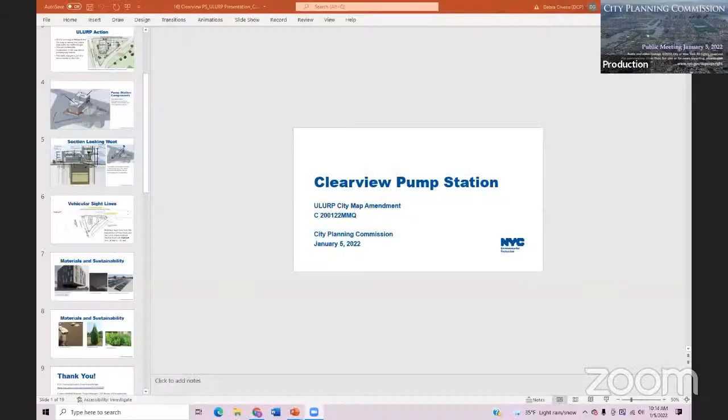Thank you, Commissioners. The next part of the calendar is the public hearing section on page 17. Borough of Queens, calendar number 16, CD7, C200122 MMQ. A public hearing in the matter of an application for a city map amendment concerning the Clearview Pump Station rehabilitation.

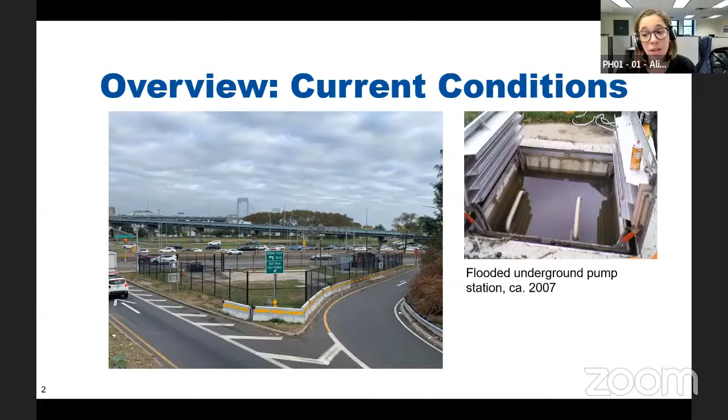Next slide, please. In order to move forward with the reconstruction of the pump station, which is fully designed with Public Design Commission input and approval, DEP is pursuing a change to the city map to demap the portion of the traffic triangle where the existing pump station is located. That area is shown here in red, overlaid on the proposed site plan.

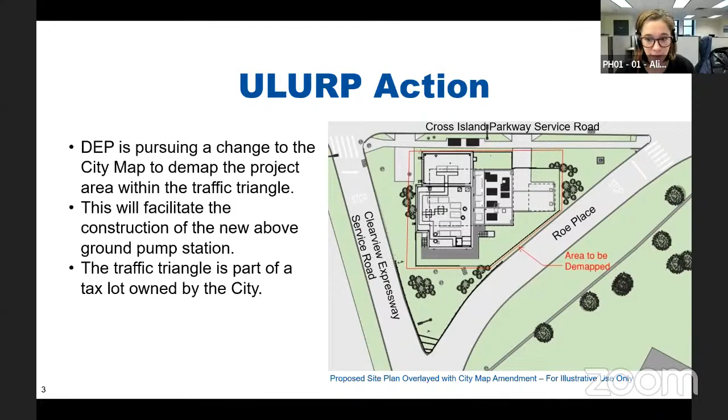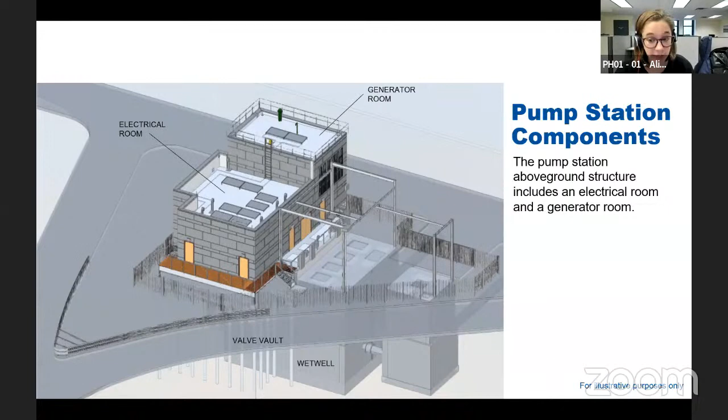Next slide, please. The above ground structure houses an electrical room and a generator room. Community Board 7 recently asked us whether the height of the building could be reduced. We explained that the height of the building is set by the floodplain and the equipment housed within. Additionally, we have worked closely with DOT to ensure that the vehicular sight lines are not compromised. In fact, they will be improved by this project.

Next slide, please. This section illustrates the interior electrical and generator equipment and shows how the 500-year storm floodplain, noted here in blue, raises the interior floor of the building to 4 feet off the ground. We have worked hard to make sure the structure is as small as possible, both in footprint and in volume, and I can get into more detail on that in the Q&A if requested.

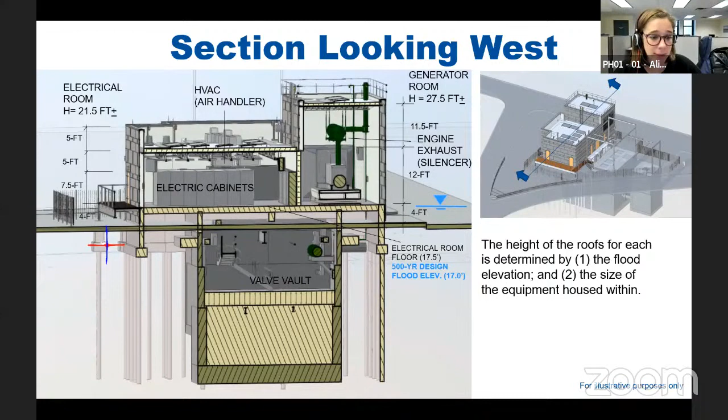Next slide, please. This diagram illustrates that the proposed condition actually improves the line of sight from Roe Place from 39 feet to 155 feet because the existing electrical equipment at the corner is being removed and the new resilient superstructure is pulled back on the traffic triangle.

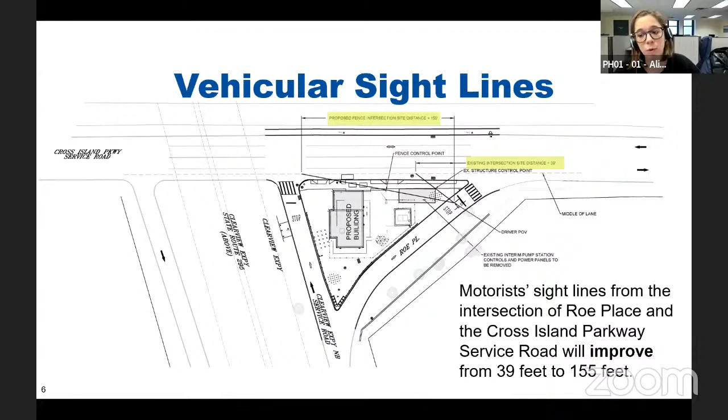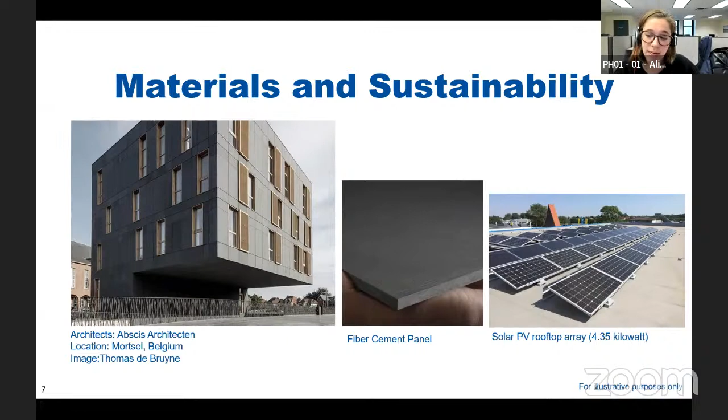Next slide, please. The architectural design features a rooftop solar array that can generate 4.35 kilowatts of green energy in accordance with Local Law 94 and a high efficiency fiber cement panel cladding. This is a lightweight, highly durable and attractive material, and you can see an example of it here on the left used to great effect in Mortsel. The renderings that you saw really don't do this material justice, so I wanted to make sure I spoke to the design intent and our desire to use sophisticated building materials and thoughtful design in DEP projects.

Next slide. We will also have areas of permeable pavement to manage stormwater runoff and native plantings to soften the edges of the building. The design is complete with Public Design Commission approval and the contract is ready to begin procurement with the goal of beginning construction this summer. That's my last slide and I'm happy to answer any questions that you may have.

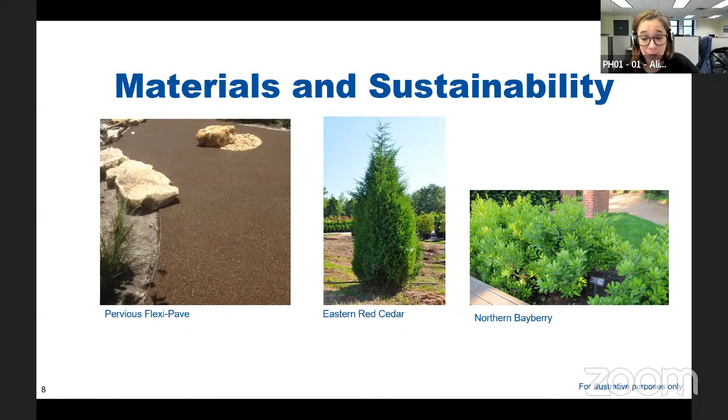Commissioner Ramprashad: Yes, thank you very much for the presentation, and I appreciate the additional section drawings. I didn't see that before in our packages, so thank you. Just two quick questions with regards to the landscape and the guardrail. DEP will be maintaining that throughout its life, right?

Yes. Okay, and the other question I had was, the borough president mentioned about trying to create 2 lanes. Has that discussion gone further with the DOT?

Yes, so DOT has met twice with Community Board 7 and the council member also attended, I think, at least one of those meetings to better understand their concerns about the level of service on the surrounding roadways. DOT explained why adding an additional lane is not an easy or really safe solution to the traffic issues happening here, and they have committed to work with the community and state DOT to find a better solution. Okay, thank you.

Thank you, Commissioner Burney. Oh yeah, thank you.

Thanks, Alicia. I don't know if you were listening in on the review session on Monday. There was some discussion about the design of the building, and reference was made to that other organization, the Public Design Commission. I don't know if you know about that. Oh yeah, I'm pretty familiar.

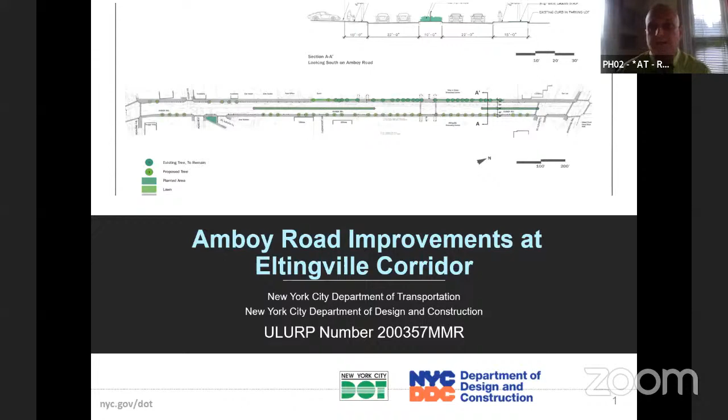Good morning, everyone. Thank you for having us. This is a project in Staten Island. It's a 2,000 linear foot corridor of Amboy Road in the Eltingville section, and it's sponsored by the Department of Transportation and Design and Construction. Next slide, please.

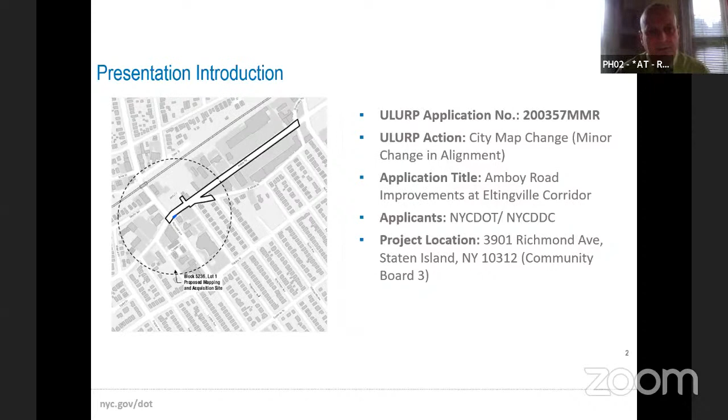I think most of the information here has already been stated, but the project location is 3901 Richmond Avenue, Staten Island, and it's Amboy Road improvements along the Eltingville corridor. This graphic shows you the full extent of the project, which is aimed at improving the commercial corridor.

And the little blue triangle is a small area of acquisition necessary to facilitate these improvements. So I'm just going to quickly go through what the project purpose is, a description of the actions, a description of the corridor and the land use and zoning conditions. There was a CEQR EAS and a negative declaration issued for the project, and then of course any questions you may have.

There's a lot of words here, but I'll distill them down to the city map change for that little triangular portion. The area is outside of the mapped right-of-way at Amboy Road, and the purpose is to facilitate a realignment here because the intersection isn't aligned in a way that the geometry is adequate for what the improvements are intended to achieve. There's a really small area that totals about 120 square feet. It's a triangle, that's the total area - about 6 feet by 30 feet long, 6 feet along Richmond Avenue, 30 along Amboy Road. In addition, with this lot, which is currently occupied by a Burger King, it's a commercial property. There's about 4,330 square feet that would be acquired, but that's already in the right of way and already mapped. So the mapping is really limited to this small triangular area. As I said, the acquisition would allow the city to realign this intersection so that it can be more geometrically appropriate.

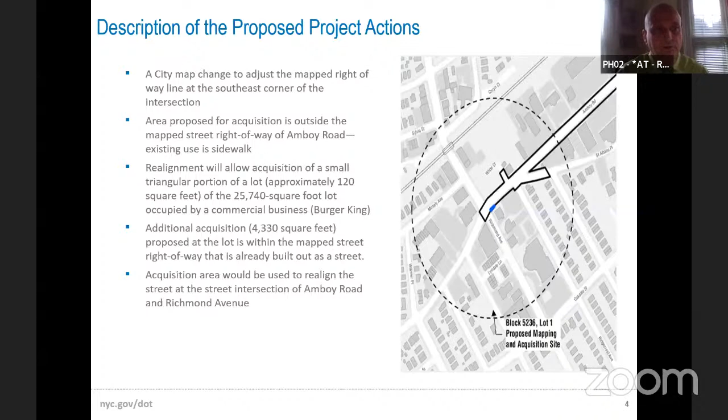Amboy Road, as you probably know, is a critical east-west transportation route across Staten Island. It's also a very critical and important commercial center for the Eltingville area and the surrounding area. The capital project would allow the streetscape to be designed to DOT standards. It would facilitate traffic flow and turning movements. The project as a whole would facilitate accessibility to the commercial center here and would also allow for landscaping and aesthetic improvements that would beautify and improve the corridor as a commercial destination.

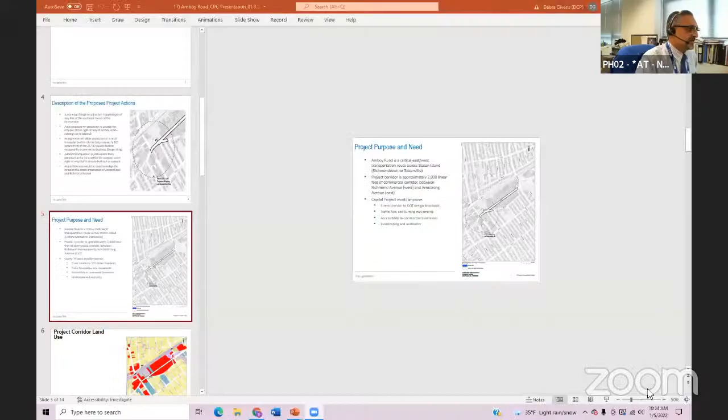Yes, and maybe Nitin. Our project will end on the east side of Richmond Avenue compared to what is shown in there, because whenever we do the intersection, it does all 4 pedestrian ramps. So if it's going past that intersection, it seems like we will go up to the pedestrian ramps, which are across the street. That's the reason it is shown that way.

That includes the intersection, I appreciate that, I understand what you're saying. So all four corners - I want to ask you something about the sidewalk corner on the Burger King corner in a moment. But so the reason your line that encompasses the project geography goes to the east of Richmond Avenue is because all four corners, yes, will have the ADA required pedestrian ramps, corners. Yes. Okay, very good, thank you for that.

What happens where the little triangle is being acquired? What's going to happen going north on Richmond Avenue when you get to the corner? What happens to the sidewalk, and how does it meet the crosswalk? So what happens to the crosswalk as you continue to move, I'm gonna say north on Richmond Avenue, on the west side of Richmond Avenue at Burger King, if you're clipping the corner as it exists now. So what can people expect in terms of the experience of getting to the corner and crossing north?

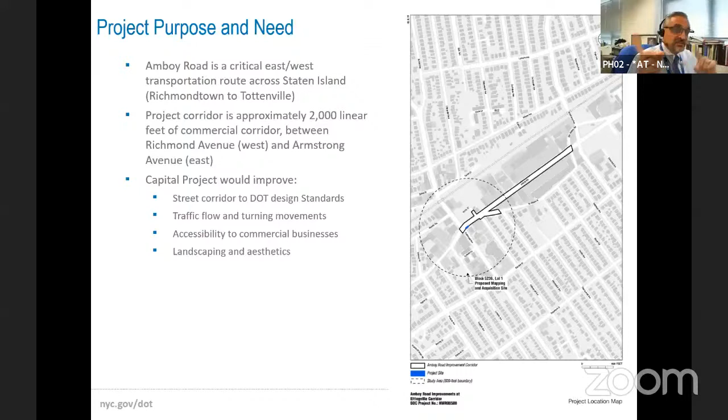The last question I have is: is the project fully funded? Is it completely budgeted through the two years of expected construction? It is city funded, actually, city and Borough President fund or something like that. The allocation is great.

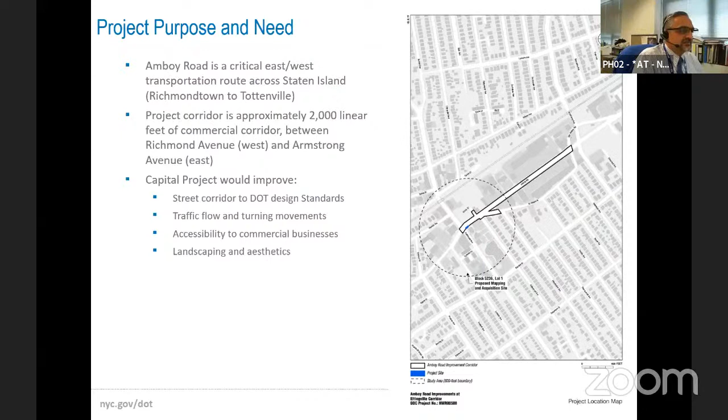I just wanted to make sure that, especially with changes in administrations at both City Hall and Borough Hall, nothing slipped through the cracks. It is fully funded, yes. So it shouldn't be on someone's list to put more money into at some point, unless the costs change, but that's a whole other issue. I appreciate that, thank you very much, gentlemen.

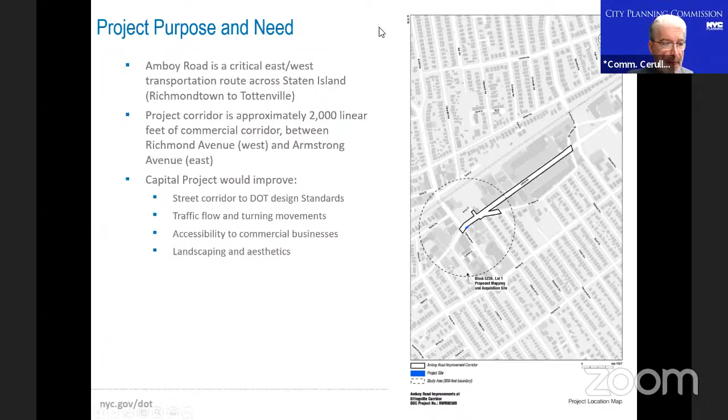Just a quick thing, Mr. Patel, you've been working on Amboy Road since you started at DDC, like 45 years ago. My question is, are you ever going to finish it? We plan to this time. I'm just giving you a hard time. It's okay, I know it's tough. Keep up the good work. All right, thank you, nice seeing you.

You too. Are there any additional questions for this team?

Okay, if not, then I will just ask whether or not there's anyone else present who would like to speak on this item. Ryan, let me know if there's anyone. There are no further speakers on this item.

Next item, Borough of the Bronx, calendar number 18, CD6, C220091ZSX. A public hearing in the matter of applications for the grant of a special permit concerning 660 to 668 East Fordham Road.

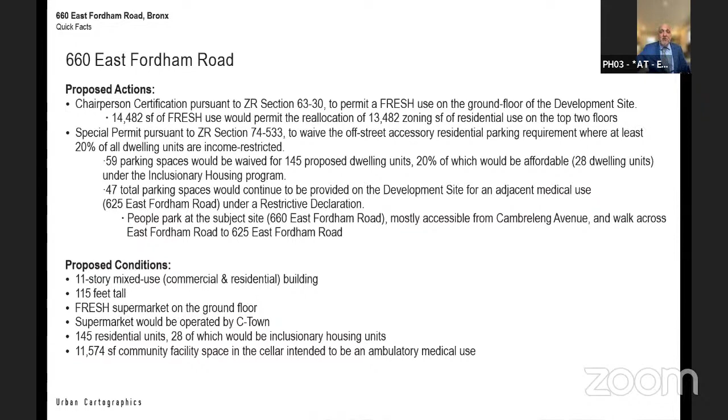Next slide, please. You can see the building here. It's not a really good looking building, it's in a difficult spot. There's been no new developments pursuant to the C4-5D district done in the last 5 years — I don't want to say since it was created — and there's been no voluntary inclusionary housing created.

You look at what the parking lot is here and look at the site. The owner is a local gentleman, his name is Sean Davenchar. He owns the building across the street. He is fully invested, he's spoken to banks. Everything is hinging upon an approval from this commission.

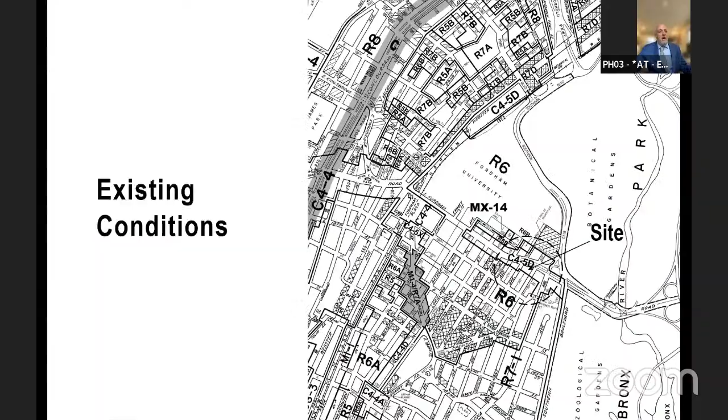Next slide, please. Next slide, please. You can see the site is right smack in the middle of everything you'd want it to be, in the middle of the Bronx Zoo, Fordham, New York Botanical Garden.

There is parking across the street by Fordham University, nearly 2,000 spots available. You can see the neighborhood around here.

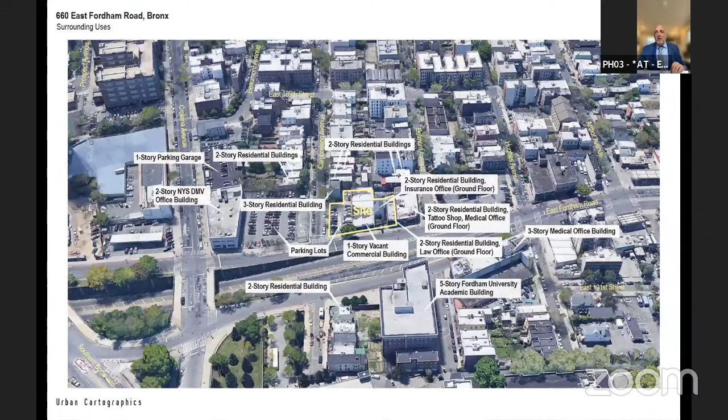This is the slide I wanted you to focus on for a second with me. The site is located right there in the middle. You can see across the street up top in the pink, 685 East Fordham, private Fordham University, 1,030 parking spaces. I dare anybody to go try to park there right now. It is locked. You're not allowed to park.

That building and that property, we believe, after reviewing quite a few documents, was approved by the City Planning Commission, and part of the give back was the requirement that it be open to the public. It's locked. I'd also like to call out that the lack of parking, although a concern raised by the community board, there was also a lot of internal personal issues between the applicants and other people at the community board that were longstanding, which is why you may not have heard the borough president echo the parking concerns in his report. And we know he wanted more units.

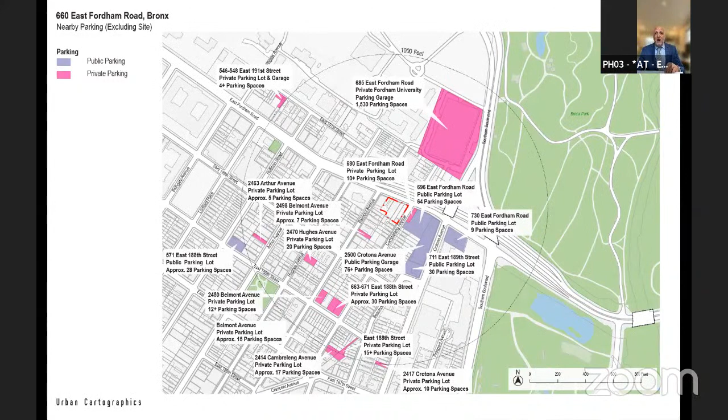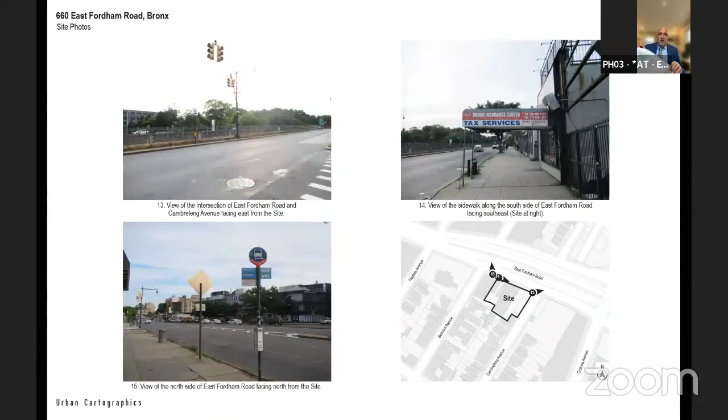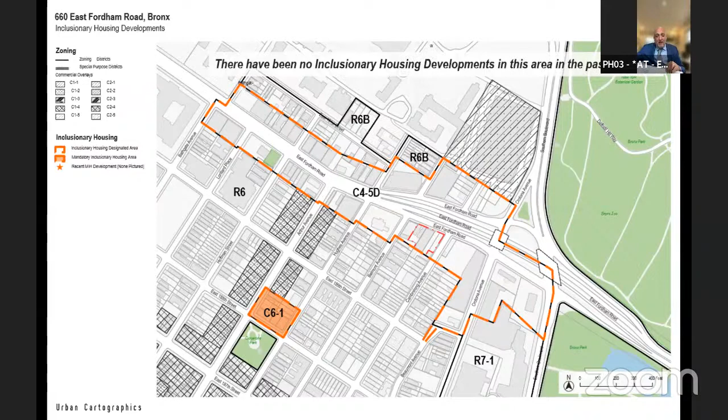People in the area need housing that's affordable. Unfortunately, 2 and 3 bedrooms, at least in Sean's mind, pushed that income level and the amount people could pay over the top. That's why the unit distribution is where it is. If we could go back and change it, we weren't chasing 421, we would, but we can't. 421 is a state law. It expires in July, or June, excuse me, with or without us. And if it goes down, so does the affordable housing.

Josh, do you want to speak for a moment about, or Jacqueline, excuse me, do you want to speak for a moment about the affordable housing, what you've done with HPD to secure this? Sure. Good morning, Commissioners. Jackie Scarinci from Ackerman, and we're representing the owners here on the inclusionary housing application.

As Eric stated, this is the unit distribution that we had prepared, worked with the owners on, and had approved by the inclusionary housing unit at HPD. There are corresponding plans filed at the DOB that have coordinated mechanical, structural, and engineering drawings that all account for this unit distribution, which has a mix of studios, 1-bedrooms, and 2-bedrooms. As the inclusionary housing program requires that we have a proportional mix, there is a proportional mix between the market rate and affordable units here.

You can also see the rents. This is a voluntary site, so it's 80% AMI and below. And actually, most of the affordable units here are, on average, slightly larger than the market rate, the 1-bedrooms and the 2-bedrooms being slightly larger. If there are any questions, I'm here to answer them during the Q&A as well.

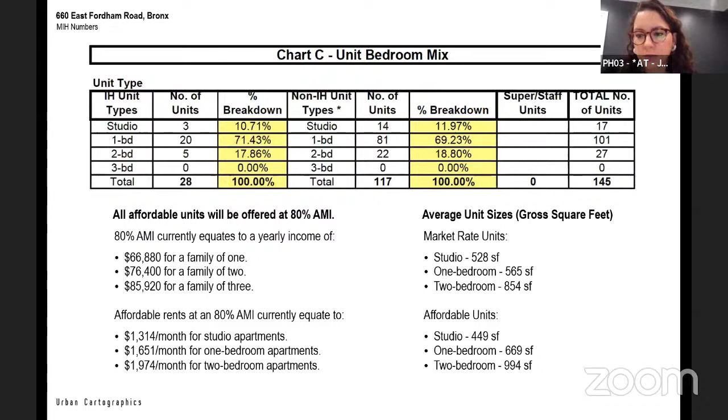We are not building cheap student housing. We're trying to build a building that's going to make a mark. The owner is a neighborhood person. As I said, he's operated the medical facility across the street for a decade. He's been involved in the rezonings. He sat in community board meetings. He sits with local electeds as time goes on.

He did not mean to run afoul of a unit distribution mix, nor did he ever mean to get into the middle of a unit distribution mix desire and an HPD 421 deadline. And that's where we are. So please, we're asking you to look, as the new mayor says in his term, I love it, it's emotional intelligence, and I've interpreted that to mean to look behind the scenes.

Not every effect is there for the same causes. We would change it if we had the time, but we don't have the time. We still don't even have solidified financing. We're very close, and it's all hinging on everything coming together. Trying to get a lender to lend on this strip in this area for a brand new ground-up development is no easy feat. We're close, and the owners invested a lot to see that happen.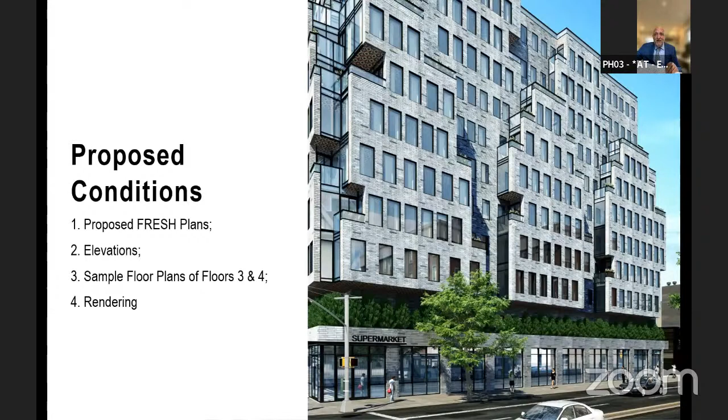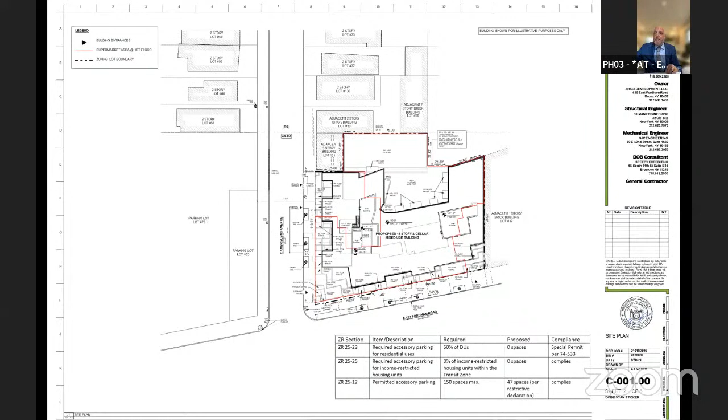Next few slides, we'd like to ask the architect to speak to it. Ben, if you could speak to the layout and configuration of the traffic and landscaping for the next couple of minutes, show the commissioners how you get in with cars, and show them what you've done at the second floor to add the additional parking spaces, and why you're limited to just adding 9 more. Good morning, Ben Greenwald. Good morning.

Yes, I'll talk to that. I just want to say for one second what Eric said. Since we have been with this client, Sean, the only thing he's constantly said is this building is designed for people of the community. The amenities are made up for people of the community. There are families. Everything is based for families of the community that work for him, and that he knows, and he knows what the community over there needs.

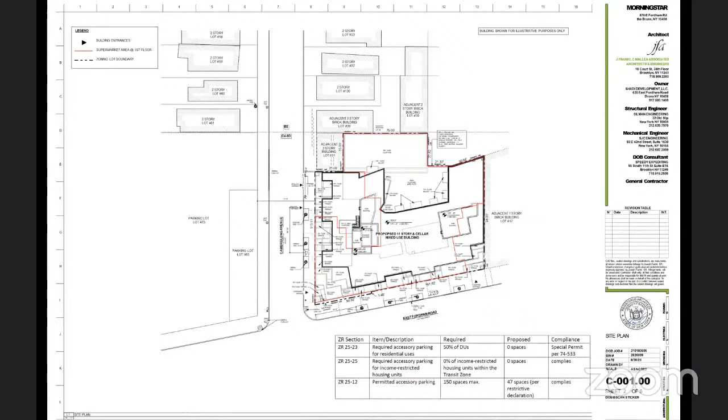Regarding the parking, if you go to the next slide, this is the first floor. There's a fresh- if you'll see, there are 2 car lifts that will bring the cars up and down. There's an undercover, covered loading berth right before, so people could come in, and there's an attendant booth, so people don't have to park their cars themselves. They come in, they drop the car, and the attendant will take it up with one of the 2 elevators provided. The reason we have 2 elevators is because we know sometimes traffic could pull up, so the owner wanted to put in 2 elevators. This way there's always enough room, always enough people to take a car up and down, so people don't have to wait for their cars.

Ben, if I caution you, you have 30 seconds left, Ben. Next slide.

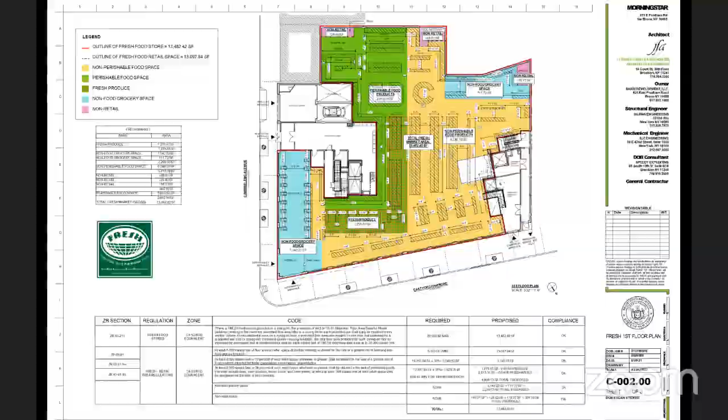Over here, this is the second floor. You'll see we added another 9 spots. We added some stackers, so you have 25 stackers and 6 non-stackered parkings. This gives us an additional 9 spots besides the 47 declaration that we need for the other building.

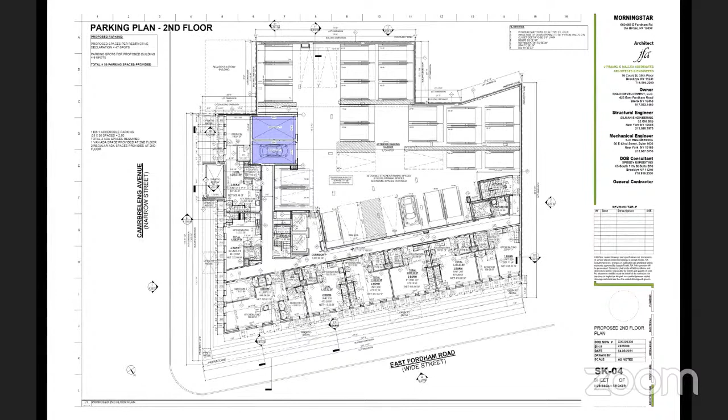You asked a question about the planters. We heard the question, so I'll talk about that for a few seconds. If you go to the next slide- it's right after this, Ben. So if you see- your time, excuse me, your time has expired, but I will ask the first question for you to just elaborate on the planting.

One of the main focuses for the client was that he wants to build a beautiful building, something unique, something nice for the neighborhood. He wants to bring in environmentally friendly elements, make it feel nice, and work with the environment. One of his main things was to add a lot of greenery into the building. If you see on the first floor, there are a lot of trees, and on all of the terraces, there are tree plantings. I've heard a question about how this is done.

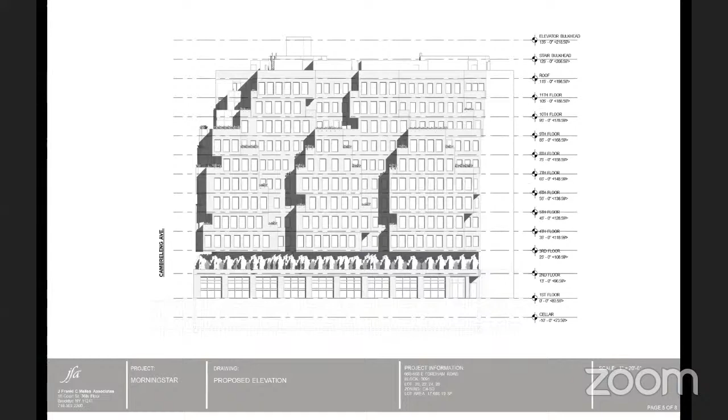So in the next slide, we'll show you how we're doing these plantings. All of these planters go into concrete boxes, concrete planters with special drainage, special soil that continuously feeds and drains the water throughout. This is something we're doing a lot on buildings- it's done on most of the rooftops. It's a proven system that works and brings beautiful, amazing results. It brings a green environment into buildings and gives people living there the feel that they have outdoor space with greenery and fresh air. If there are any other questions, I'll gladly answer.

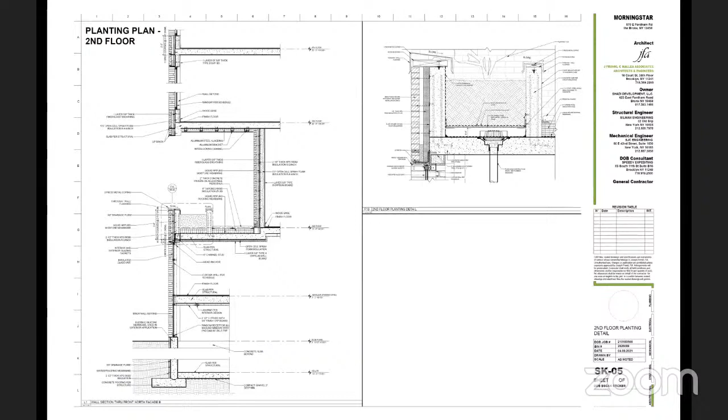Okay, thank you, thank you very much for your presentation. Thank you for the presentation. I just had two questions of my own, one of which was with respect to the additional parking spaces.

If you're telling us this addition is the maximum you can accommodate on the site, I'd just like to understand that. Yes, because when you add parking, every stacker needs to have maneuverability as well, and we need ADA spots. So in order to be able to maneuver all the cars, we could only fit in 25 stackers. The 25 stackers give us 50 spots. Besides that, we need 6 spots- 3 of them are ADA, and the other 3 are regular spots able to be maneuvered. We have looked at this over and over again. If we could have given more spaces, we would definitely do so.

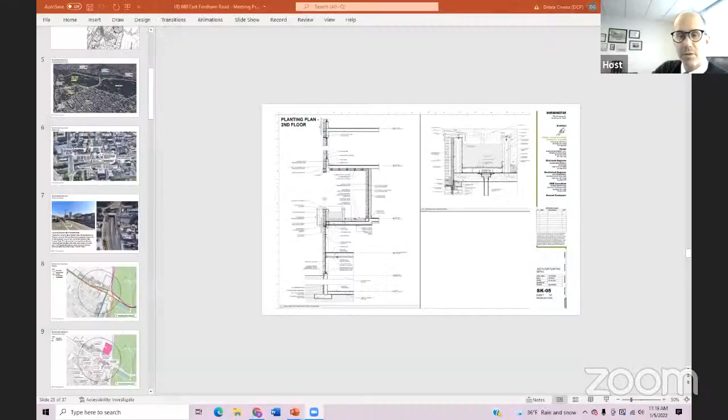Is there a way, Ryan? Yeah, we can try and get that up. Screen 5. We can try to get that up. Jeff, do we have it? There we go, here we go. Okay, which slide is it? I think it's 5. It's an aerial, there you go.

Free right there, beautiful. Okay, so what I'm trying to depict here is, first, everything slopes up a little bit towards the Botanical Garden. You can see that Fordham University, between us and the Botanical Garden, is quite some distance away. We're up very high in the sky here. Our building, of course, is to the north of that, and the sun comes from the south, so that helps also.

I imagine everything would be a sensitive receptor, and then the full analysis would have been done there. Plus, we did an EAS analysis as part of our studies, as we're required to, and we received a negative declaration from the city's Environmental Assessment and Review Division, the division of EARD, from the City Planning Commission. So I don't think that's the basis - the picture, my common sense looking at it, the EAS that's been done, the past history of the rezoning, and the location of the property - I think all give me the confidence to say that I don't think it causes any issue. I think the paperwork we probably would have screened for it, I'd imagine, but I could triple check that for you also and get back to the commission.

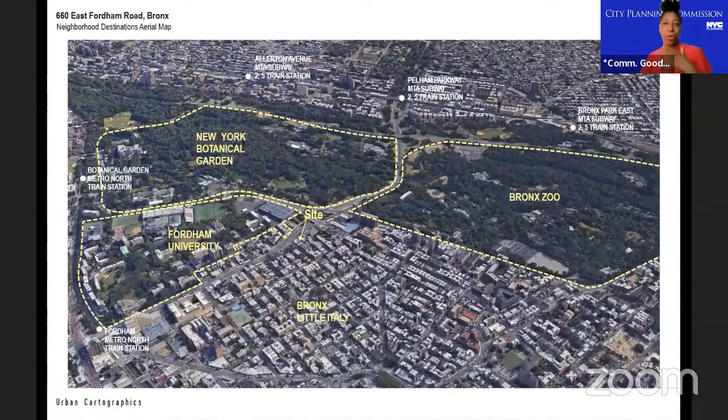It's a bit like Whole Foods, which I'm not sure if it'll be really affordable. Oh, no, it's down. C-Town. Oh, C-Town, okay. I was thinking of Fresh Market, which I'm thinking is sort of like a Whole Foods.

My question on that is, I don't know if it's already been decided that it has to be a supermarket, but since there's been a lot of discussion about the fact that that area is very family oriented, would there be any thought to something like a daycare, something that would directly address the family oriented nature of the neighborhood?

There is no 'the Fresh program' separately — the supermarket is part of the Fresh program. That's the proper noun for the bonus. There's a bonus that could be achieved under the chair's authorization. So it is locked in, and that's part of, as you can see, following the theme of the building. We're trying to get every square inch.

The only way to get it financed is no different than all of us — I don't know if anybody bought a car recently and saw the VIG they put on the cars. The banks are no different. The only way we can get this financed from a bank is if we get every square inch we can out of it. So the Fresh and the parking reduction are both an attempt to satisfy a bank and a lender to show them that it's an unproven market. We're providing affordable housing, it's a risk. We get that, but we're very comfortable that we could pencil it out. So the Fresh program allows that to happen by providing more square footage, as does the parking reduction.

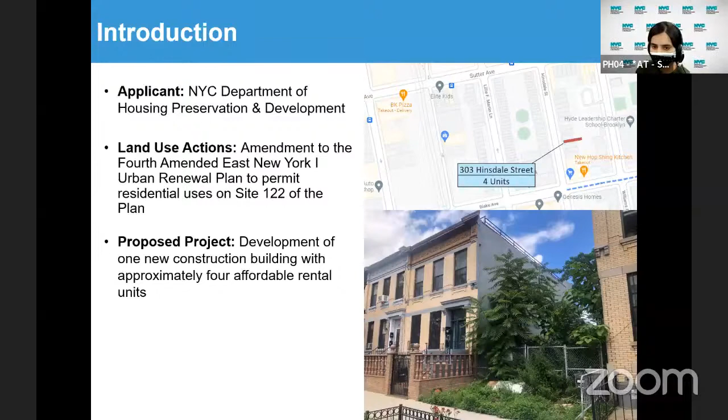HPD is seeking an amendment to the East New York 1 Urban Renewal Plan to change the use restrictions on Site 122, located at 303 Hinsdale Street, from open space to residential use. As you can see in the picture, the site is an underutilized vacant city-owned property. Approval of the requested action would facilitate the development of a small 3-story new construction building with 4 affordable rental units, an appropriate use to its surrounding context. The proposed project would improve the vacant lot, elevate the overall condition of the site and its neighboring buildings, and bring additional affordable housing to the area.

The development site is an ideal location for residential development, as seen on this aerial view. It is adjacent to 1 and 2 family buildings and across the street from a former shelter that is being redeveloped into affordable housing. Public transit in the area includes the L train at Van Sinderen Avenue 2 blocks to the west and the 2, 3, 4 trains at Livonia Avenue to the south. Bus service in the area includes the B14, B20, and B83 lines.

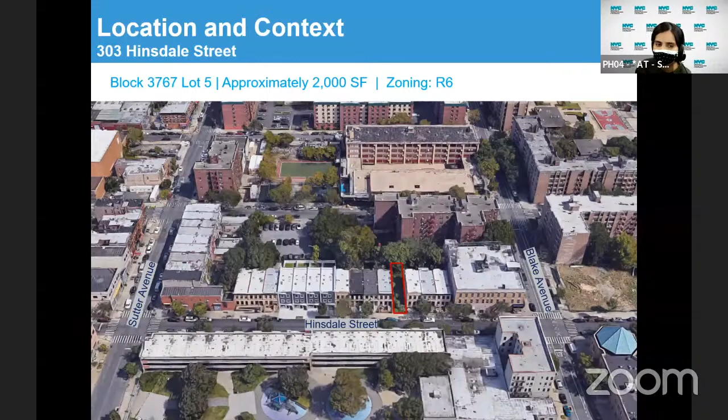The area surrounding the site contains several open space uses, as this map shows. For example, the PS 328 community playground is located within 600 feet of the proposed development, and the Success Community Garden and an open space within NYCHA's Unity development are located within a quarter mile. Beyond that, there are many other parks, playgrounds, and gardens within half a mile, including Hands and Heart Community Garden, Grace Playground, and Livonia Park.

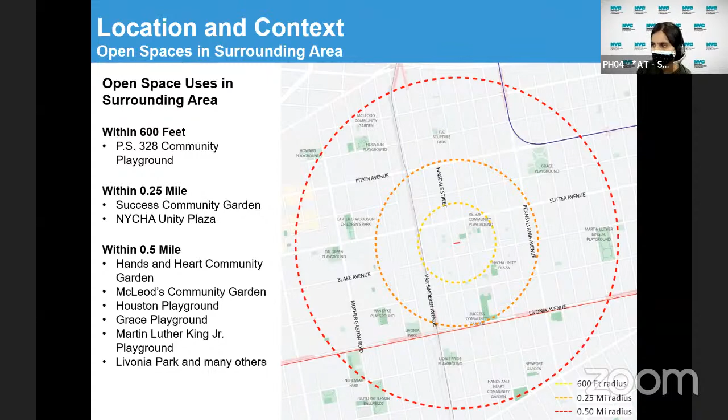In consideration of the site's immediate neighboring context, the proposed development is a small 3-story residential building with 4 affordable rental units developed under HPD's Neighborhood Construction Program, or NCP. The proposed building will have a mix of unit types, including studios, 1- and 2-bedroom units, and will serve households earning up to 60% of area median income.

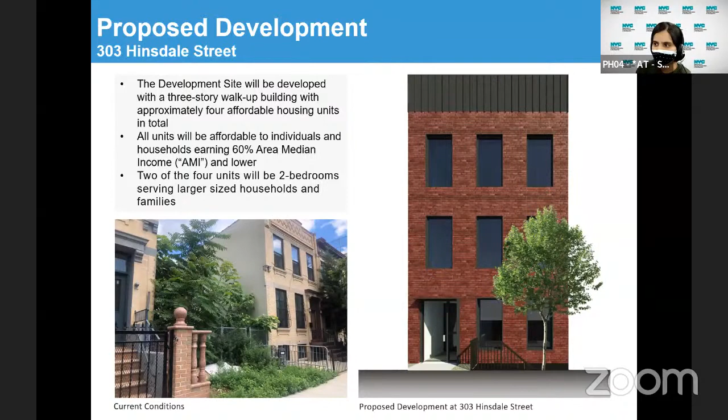And finally, we're anticipating ULURP approval in spring of 2022, hope to close in the summer of 2022, and complete construction in winter of 2024. Thank you again for having us here today, and we're open to any questions. Thanks.

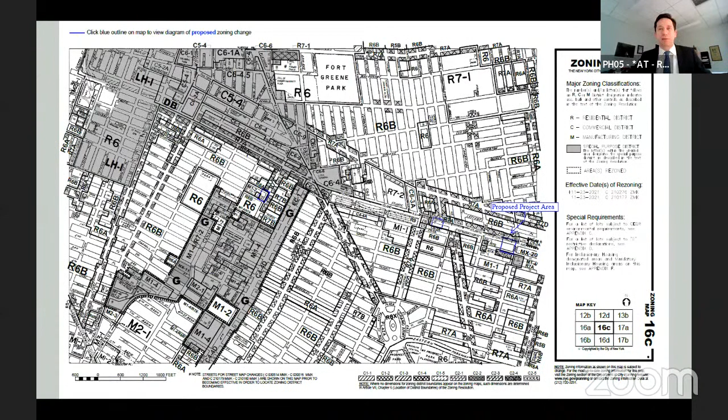Now, all of these involved streets that were narrow streets per zoning, and of course, Atlantic Avenue here is a wide street. Next slide.

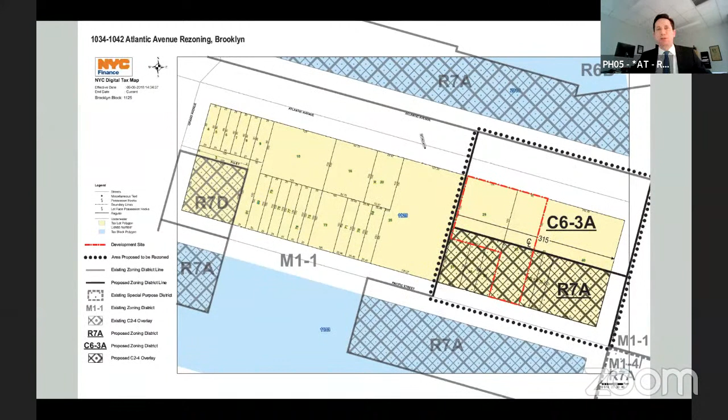So briefly, you can see the tax map here, as well as the development site highlighted in red, which would produce the proposed 17-story building with a lower massing along the R7A portion on Pacific Street.

Next slide. The land use map actually really well illustrates why we feel this rezoning is appropriate, primarily because you have Atlantic Avenue here at 120 feet. This is an extra wide street, one of the widest thoroughfares in Brooklyn. And given the width of the street and prior city planning actions, as well as the department's presentations to the commission, the street width here is really well suited for the bulk of this building.

This is a unique opportunity to provide residential and, importantly, affordable units in an area with excellent transportation options, which is close to retail and services and allows for commercial use as well.

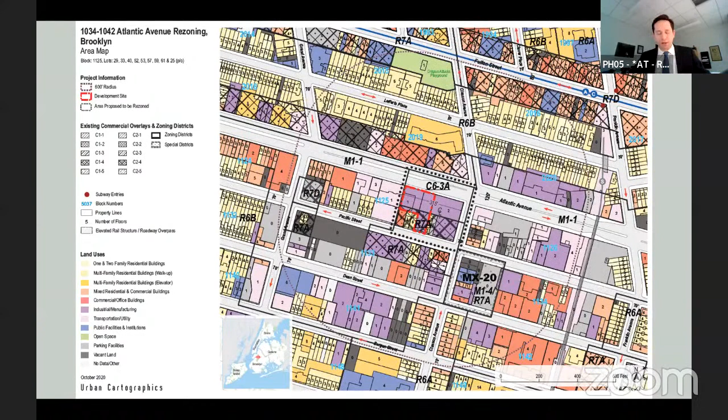Next slide. So I think with that, if we can just page through the photos showing the surrounding area and the low-lying manufacturing buildings, the next slide with text would be the environmental review portion.

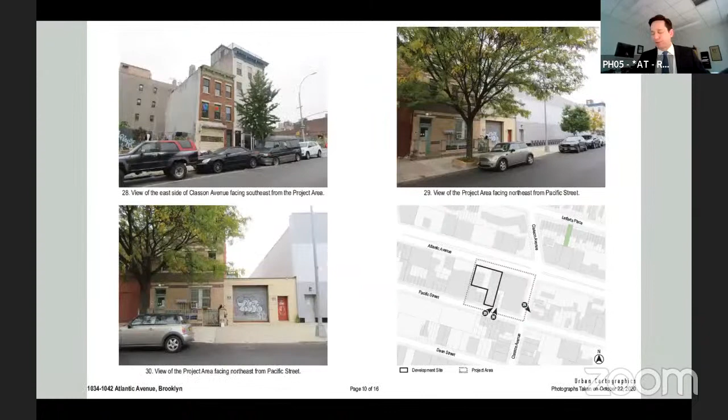And for that, I would ask Kevin to speak for 2 minutes. Kevin? Thank you, Rich. Can everybody hear me clearly?

Okay, so an environmental assessment was performed on the project. The typical type of impact categories were considered with particular reference for a project of this size. I can go to traffic if there are any questions on some of the other analysis, such as socioeconomics that was performed, or any of the other components.

In terms of traffic, a comprehensive traffic analysis was not performed. Having said that, in terms of vehicular traffic, you only trigger what's called a level of service analysis when you exceed 50 cars per intersection. The project does not exceed those numbers. A pedestrian analysis was performed because the project generates over 200 trips at the project corner on Atlantic, and there showed no reduction in capacity on any of the sidewalk components.

We also performed a parking analysis. That parking analysis showed a comprehensive parking analysis for a quarter-mile area, including on-street assets, as well as a qualitative look at off-street assets such as private car garages. What that analysis shows is obviously parking is constrained, but we analyzed 2 time periods, in March and November, to account for COVID. During March, there were 418 available spaces of capacity in the on-street capacity within the quarter-mile. During the November 20th at noon utilization, there were 71 available spaces of capacity.

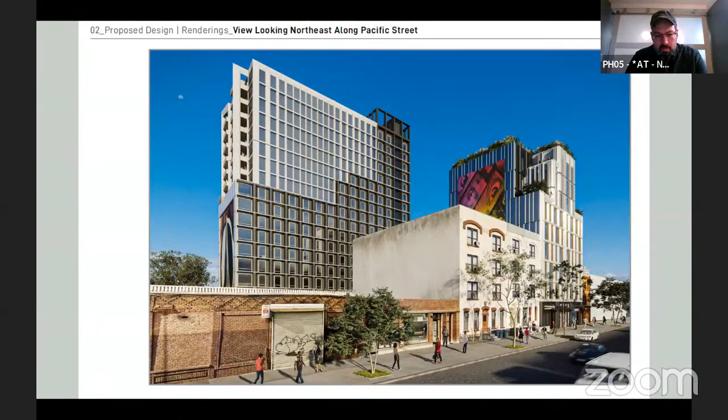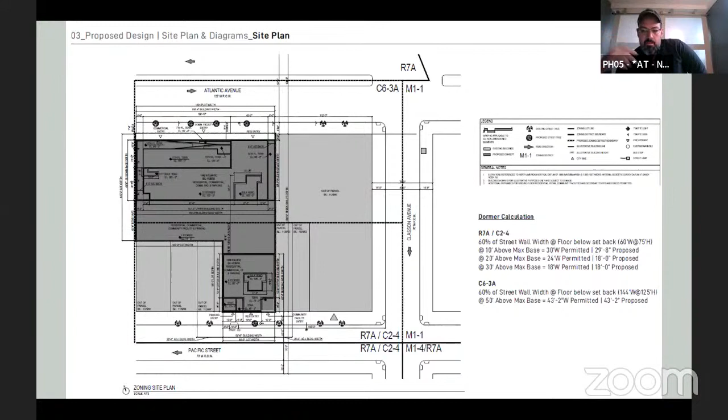The C6-3A is a very interesting district for this project because it gives us something counterintuitive at first blush, which is that the extra height lets you do something with the building form that lets you attenuate it in a way which reduces the impact to the street. So this is something that, beyond the land use rationale that Rich discussed before with the width of the streets and the proximity to all the transportation infrastructure, lends itself to a much better building massing, vis-a-vis the street and the pedestrian experience.

Next slide, please. So you can see here, the larger building, what this lets us do is playfully push and pull with this massing in a way that reduces the impact on the street. So you have the lower building portion on the west side, which is to the right over here, and on the east side you have this taller tower element. So you get this point-counterpoint compositional interplay, which again reduces the impact on the street.

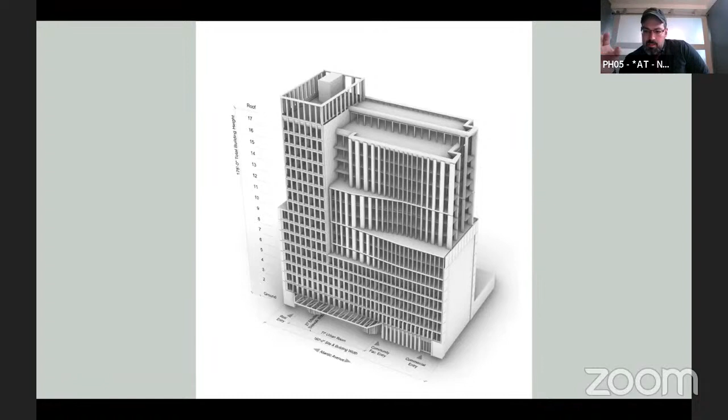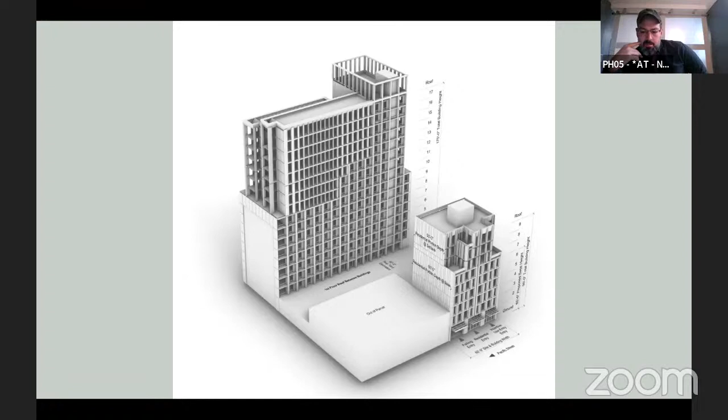Next slide, please. This is the rear of the building and of the Pacific building. So the Pacific building you can see here is 9 floors, 95 feet high, which is typical of the R7A, which is infilling this entire area. There have been several rezonings across the street, on the corner, down the street, and this is also generally in keeping with the M-CROWN plan that the neighborhood had come up with originally. So you get this infill development, which is typically 8 to 9 stories tall with a setback between the 5th and 7th floor. Next slide, please.

We have parking in the cellar. What we had originally set up was a community facility, a childhood rec center, something akin to a Y, and we've been going back and forth with the community board for the past year trying to dial that in. Right now it's not certain that's what we're going to be offering, but that's what we had been designing for about a year and a half. So we have this rec center, which is in the cellar, open to the first floor. It has a very significant presence on Atlantic Avenue. The thought is that we have something we'd be offering back to the community. This would be one of the more significant developments in this area.

And it's something where our client Eli Pariente has a very honest desire to really make this the heart of this neighborhood, and there's something appropriate to that, both in the way it's situated vis-a-vis the rest of the neighborhood. It's in the middle, and in the way you could think about Atlantic.

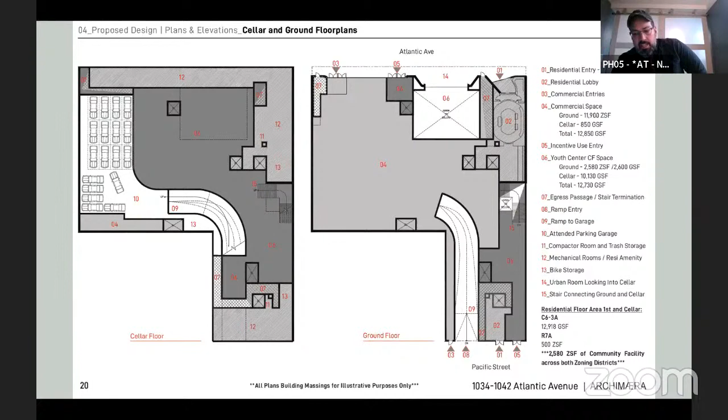We'll open it to questions from the commission. And certainly they can ask you to elaborate on anything. Are there any questions from the commission?

Commissioner Burney: Thank you. I had a question about the mural that you show at the end of the building on one of your renderings. I'm just interested, who's commissioning that? Who's the artist? How is that being processed?

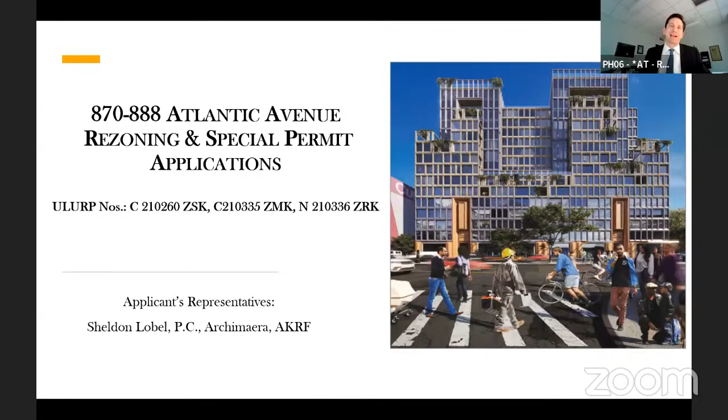So this is for the 870 to 888 Atlantic Avenue rezoning and special permit. To summarize the project, we seek 4 actions. The first would be a rezoning of 7 lots, inclusive of the project area and the development site, which is 20,000 square feet, from an existing M1-1 district to a C6-3A district with an equivalent of R9A zoning. A text amendment would also be sought. Currently the iteration included option 2 and workforce, although more recent discussions have centered around options 1 and 3. A text amendment would be sought to provide for a 20-foot minimum sidewalk width, and a special permit to reduce the number of parking spaces, which will be addressed by the remainder of the applicant team. The result would produce a 17-story mixed-use residential, commercial, and community facility building with approximately 228 dwelling units, of which roughly 69 to 70 would be permanently affordable, as well as local retail.

So this is a similarly situated rezoning, also along Atlantic Avenue. A primary difference is the prior rezoning at 840 Atlantic Avenue, the development site and project area of which lies immediately to the west of this site. In addition to understanding the history of rezonings in Community Board 8, particularly the R7A districts approved along Pacific in 1010 and 1050, as well as the R7D at Grand and Pacific, you now have the immediate precedent of a C6-3X combined district, which also included other elements on Atlantic Avenue, further supporting the land use rationale for the C6-3A requested at this site.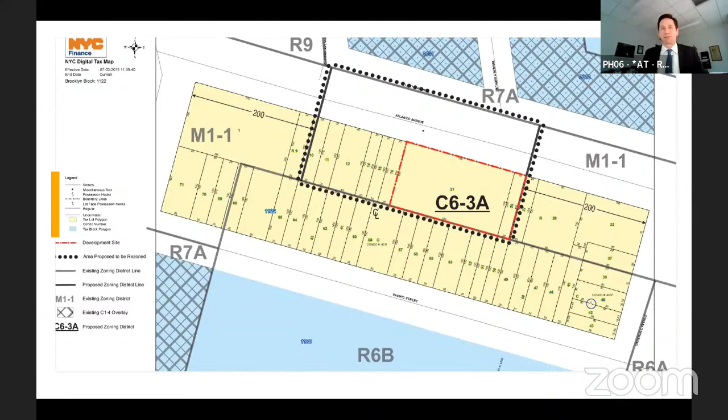So I would just conclude with the area map, which supports the rationale for the rezoning. You've got Atlantic Avenue here at 120 feet wide, and across the street you see the R9 that was rezoned as part of the rezoning along Vanderbilt and Clinton Avenues. So the additional density here on Atlantic Avenue is particularly appropriate.

We've had conversations previously with the community board, as well as the Brooklyn Borough President, on modifications and changes to the building which would allow for additional contextual changes. Those are currently in process. But we do recognize the importance of this rezoning and the opportunity now to create these units absent a larger area-wide rezoning, which has not been forthcoming.

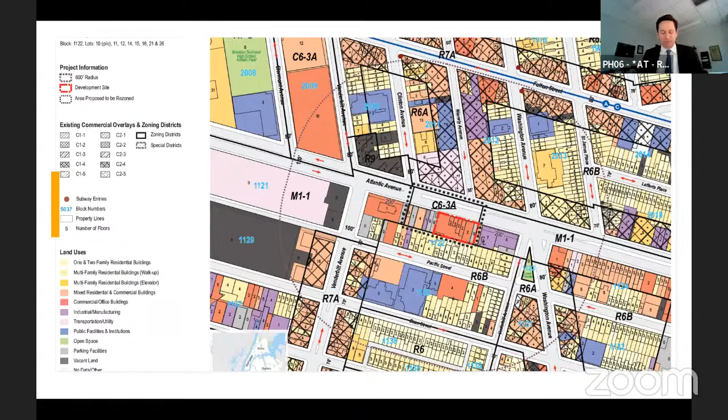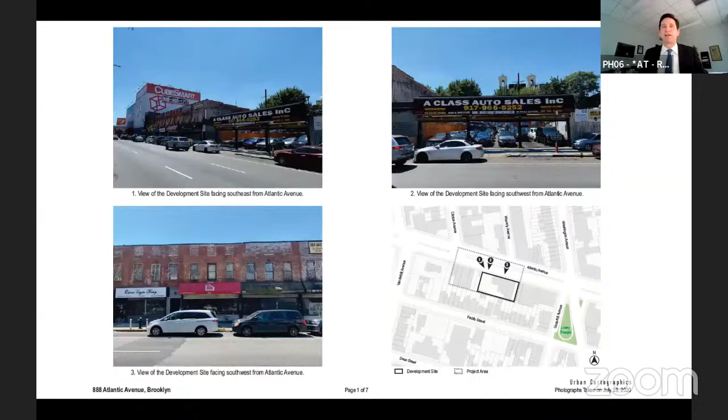So with that, we would just show the several slides - if you page through the two pages of pictures, you can see the existing low-lying auto sales shops, vacant uses, and buildings which produce relatively low floor area. With that, I would defer to Noah, who can discuss some environmental issues.

Good afternoon, Noah Bernstein of AKRF, environmental consultant for the applicant. I'll provide a quick overview of the environmental review for this project. An EAS, environmental assessment statement, was prepared following CEQR guidelines to assess the potential for significant adverse impacts associated with the proposed actions. Each of the 19 subject areas under CEQR were assessed, and while some were addressed with screening analyses, 10 subject areas required further assessment, and these are listed on the slide.

Additionally, since the proposed actions include a special permit for a parking reduction, a parking demand analysis was conducted as part of the transportation assessment. This analysis demonstrated that there is sufficient capacity in nearby parking facilities to accommodate the proposed actions' parking demand, and that reducing the proposed parking would not result in a parking shortfall.

Overall, none of the technical analyses identified significant adverse impacts. Additionally, an E-designation would be established for the project site and adjacent projected development sites in the project area to ensure that the proposed actions would not result in significant adverse impacts related to hazardous materials, air quality, and noise. With these controls in place, the Department of City Planning found the proposed actions would not have significant adverse impact on the environment, and the department issued a negative declaration on the EAS in September 2021.

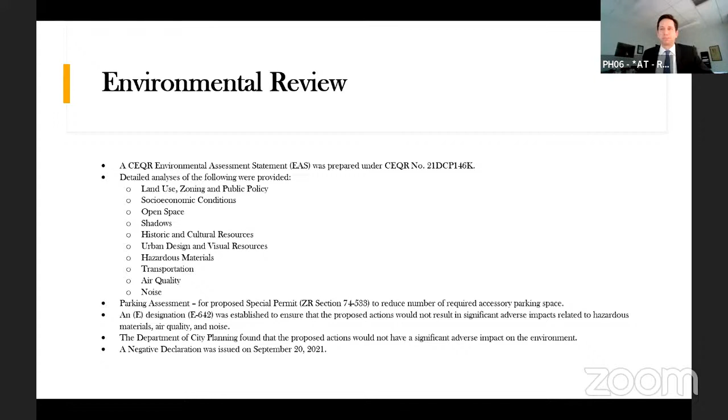Nick, you're on mute. Thank you, Rich. Thank you, Noah.

Okay, next slide please. So you can see that this building is on a lot on Atlantic Avenue, about 200 feet wide, 100 feet deep. It's very close to downtown Brooklyn, and very close to the Atlantic Yards projects, which are about one block away.

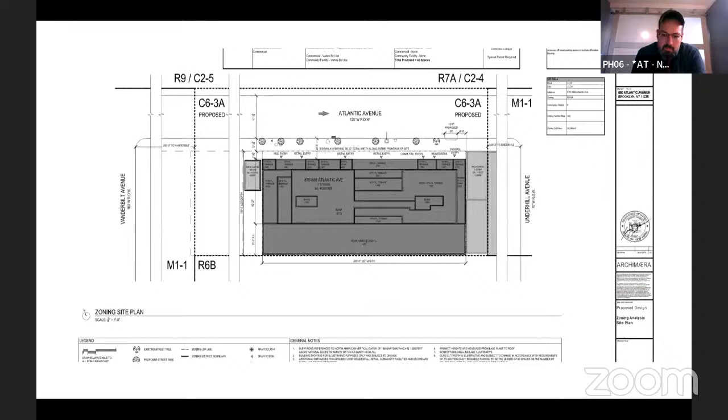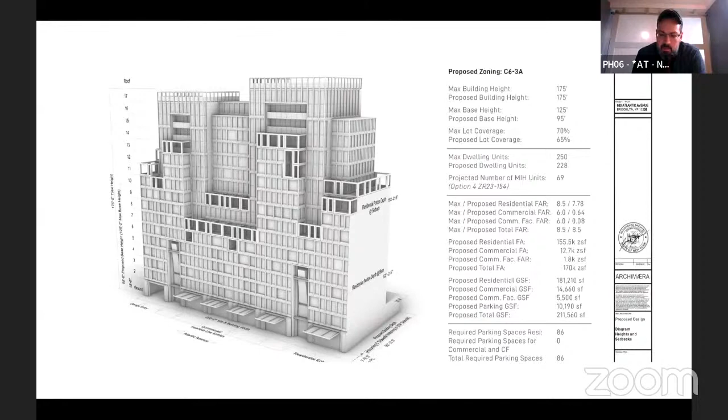Next slide please. This is the proposed massing. There's a similar massing strategy to the 1042 project, in that we are using the C6-3A to disaggregate the building form in a way which reduces the impact to the street.

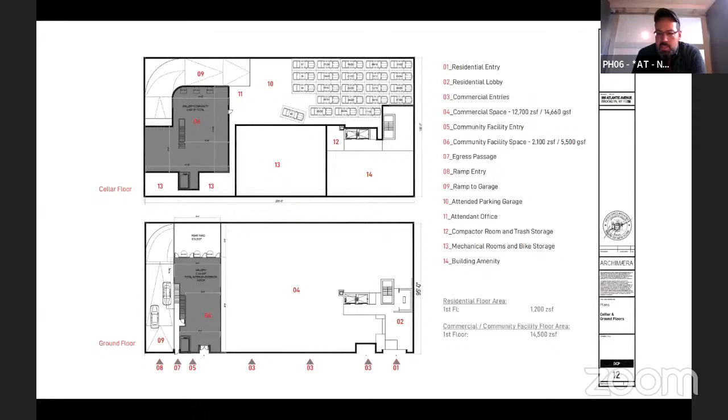We had engaged originally with a local gallery, and the thought was that we could incorporate what they were promoting into the building facade. So to that end, we had two vitrine-like objects. Can you go to the next slide please? To the renderings, please - can we go to the renderings? Are there not any renderings? Doesn't seem to be any renderings.

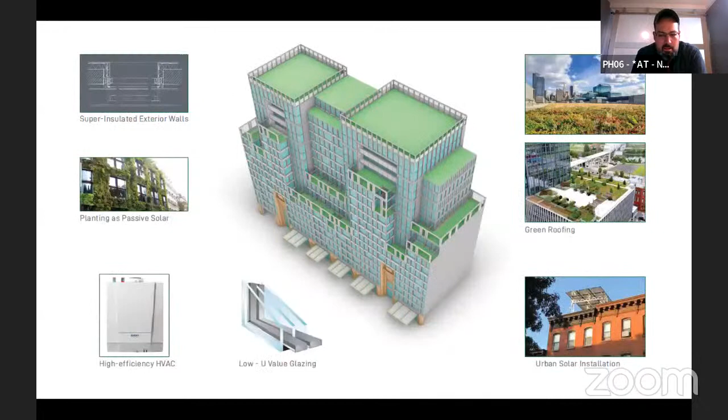And it was something that really ordered the entire facade. Now, with regard to the building form and the building scale just in general...

When we first went into city planning, there was some question as to what the most appropriate scale was. Given that there's not a lot here on these 5 or 6 blocks between Vanderbilt and Bedford, it became clear displacement wasn't really an issue, because there wasn't a lot there. The amount of affordable housing we'd be bringing on these lots far surpassed the amount of housing on the blocks to the south by itself. So we saw we could propose greater bulk, and we did comparative analysis with similarly scaled streets in Manhattan and downtown Brooklyn, and it became apparent that this was an appropriate bulk.

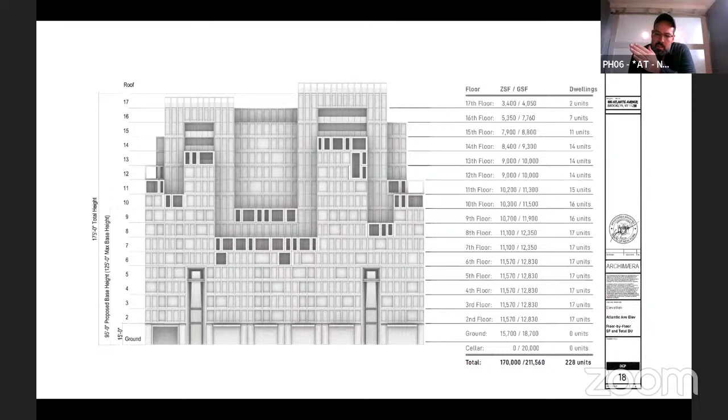One thing that became very clear very quickly was that there was this thought that Vanderbilt was the natural demarcation point between Pacific Park and downtown Brooklyn, but in fact it's actually Washington, one block further east. So thank you for your time.

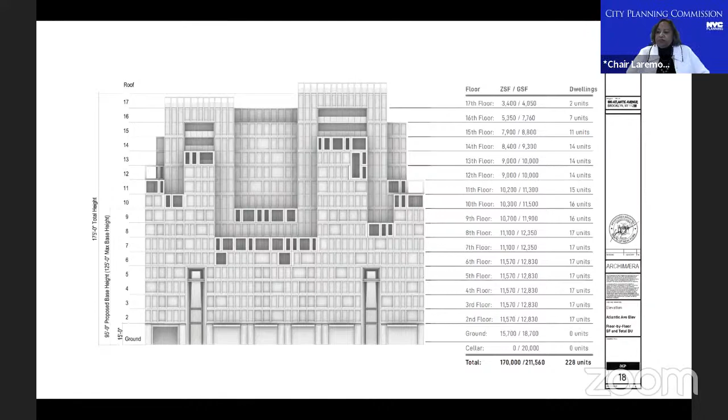Thank you, I am very happy to answer any questions. Thank you. Thank you.

Are there any questions from the commission for the applicant team on this application? Vice Chair Knuckles?

Thank you. I wanted to ask the architect, did you look at, in the course of studying density options, a possible C62A, which has been put forth by both the community board and more recently the borough president? What kind of configuration would that zoning classification yield, and specifically in terms of number of units, what would that yield, if you know?

Yeah, sure. So the C62A was something we looked at extensively in the beginning, as part of the comparative exercise. There were two things that were remarkable. Number one was that you end up with a much blockier building, because it's 1.3 FAR less than the C63A, but you get a 3-floor bump with the C63A versus the C62A. So what ends up happening is that 1.3 FAR is disproportionate to the amount of height you get, meaning you could make thinner floor plates throughout the entire building and soak it up high, which allows for a more porous orientation at the top.